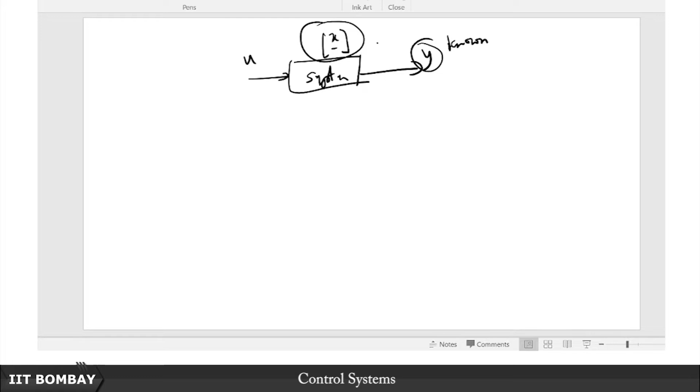What I am saying is basically, if you have the actual system, you have its output, here is its input, and sitting within the system somewhere is the state vector. Now somehow if you can rip it out based on this information that is known to you, can it be determined from y? That is the fundamental observability question. So if it can be determined from this y, then what you can do is you can feed this state information to another parallel system which is a simulated version of the original system.

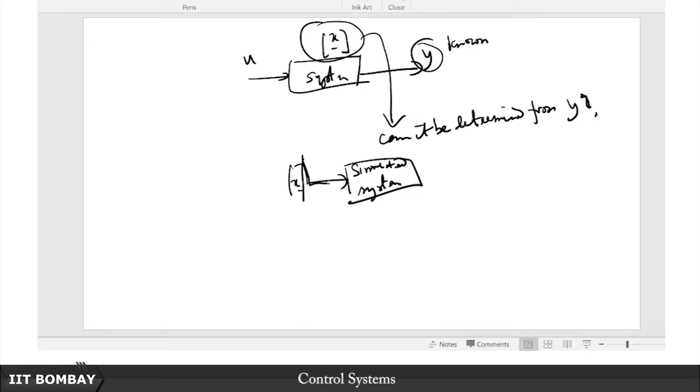So apart from providing it with the input, this is the state information that you provide along with the input, and this is your y hat. You provide the same input as given here in the same channel, and you will notice that if this is doable, if you can actually get the exact information about the state of the actual system into your simulated system by feeding that information through this channel, because after all this is a computer, a simulation platform, then what you get here at y hat is going to be identical to y. So it turns out later on we shall see that this is the idea of an observer.

Of course there is a lot of sophistication there, but this property of observability is crucial. Why is it crucial? Because it is this property that lets you answer this question in the affirmative: can you determine the state information based on the available information about the output? You can only say yes to that if it is observable. That is the crucial bit, the piece in the puzzle that is missing. If it is observable, then you can actually answer this question, you can extract the information about the state. So it is not just about the initial value condition, it is not just about the initial value problem and being able to figure out what to feed your system with.

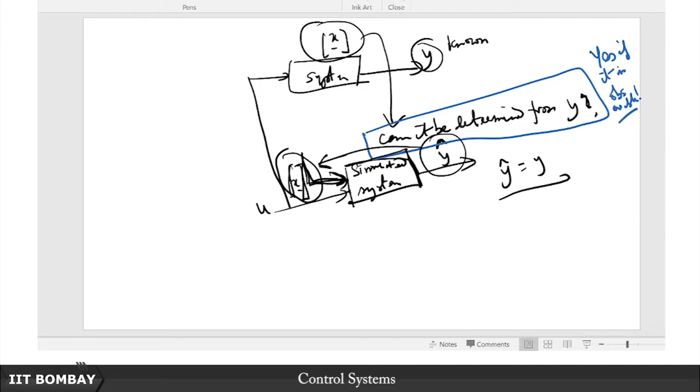Suppose this is the actual physical system, and you know what its parameters are supposed to be when the system is healthy, when it does not have a fault. If you are able to extract this state information from the output itself, and then feed that state information to a parallel computer simulation system, then you know what the ideal output is supposed to be, which is y hat. Under ideal circumstances, y hat is supposed to be equal to y.

So if you pass this through a comparator, it should always be a 0. If you say this is plus and this is minus, this y minus y hat should always be 0. So if you put some sort of a 0 detector, and under ideal circumstances that should be 0, now if that signal has some non-zero value, it means your y and y hat are deviating from one another.

Now of course you are assuming that your y hat, which is a computer, is running flawlessly because it is a healthy system—it's just a computer circuit. But your y, which is actually coming from the plant's output, that might develop some technical snag, some fault. So at least for fault diagnosis and detection, this is a very important property.

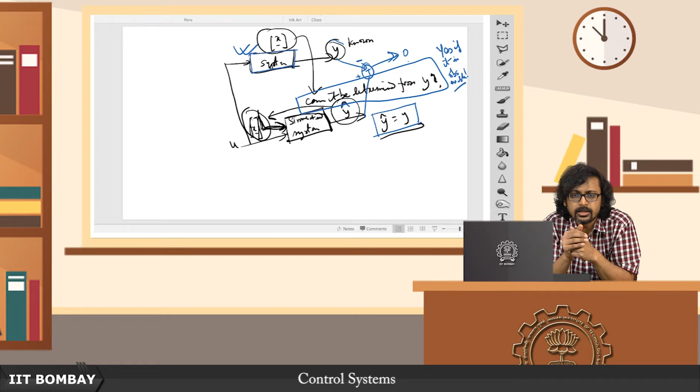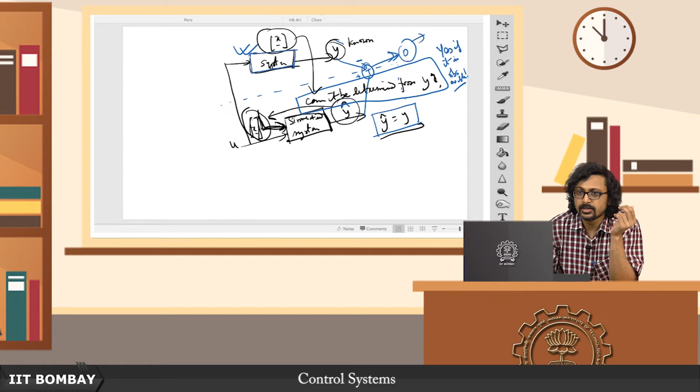The ability to infer about the state is very important, because then you can feed that state into a parallel simulation system, a computer, and compare the simulated output with the actual output to see if there is any difference. If there is no difference, your system is healthy. This can serve as a monitoring process of the system. So based on whatever this output is, if it is 0, you deduce the system is healthy. On the other hand, if it is non-zero, you might guess that something is amiss.

Of course there are small aberrations due to noise and other such phenomena, so those are always there, so you might want to keep some threshold around 0. But if it goes beyond a certain threshold, then you might actually say, well, I think the system has developed a snag, there is some fault going on.

So there are a lot of applicabilities. You might think that for the purpose of this initial value problem in this analog computer, it is an artificial problem, because after all, I have measuring devices, so if I want this particular set of y, y dot, y double dot, y triple dot and so on, why not just go and directly measure? Let's just directly measure the initial conditions at the op amps, at the integrators, and tune them till we get the desired y, y dot, y double dot and so on. So you might think, since we have access to the whole circuit, we can open up that briefcase containing the analog computer—this is a meaningless problem.

As I have shown you, it is not just about the initial value problem, but also this observability, the ability to observe or lack thereof, has very serious and important implications in things we may not have considered thus far, such as fault diagnosis and system monitoring. These are important things to bear in mind, so I hope you realize that observability is indeed an important notion.

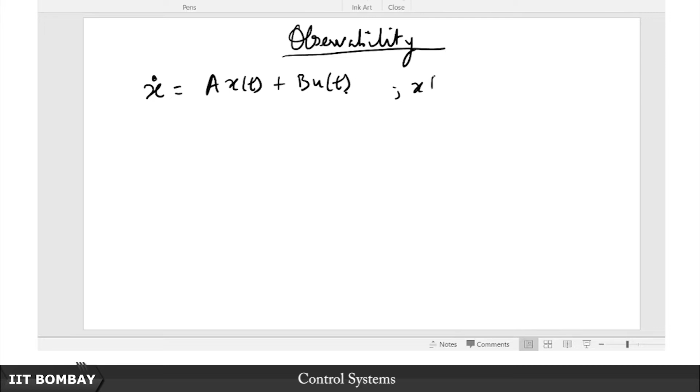So now let us launch into a little more technical discussion about observability. Let's see, initially we are talking about this initial value problem. So what is this system? The system is run by x dot equals Ax plus Bu, with x at t naught equal to x0, and y equals Cx plus Du. This is the general representation of the system.

Now suppose you want to infer about the state from the output. How can you do that? As a starting point, y is going to be equal to Cx plus Du. I am going to drop this t hereafter, just to make this simple. Now you wonder, there is after all only one output, and there are n states. So how are we going to get, from one equation, enough to solve for these n variables? It seems like an underdetermined system of linear equations, no? So how are we able to do this?

So I urge you to go back one step and see what sort of information is available when you have this initial value problem, because that is going to be the key. We are going to deal with two distinct things which are not very different, but have very subtle differences. One is this initial value problem: we want to figure out, for a given set of initial conditions in terms of y and its derivatives, what are the initial conditions for the state. Analogously, we will look at whether, if we have information about y at a given instant of time, not necessarily at 0, can we infer the state at that instant. The second problem results directly from this first problem.

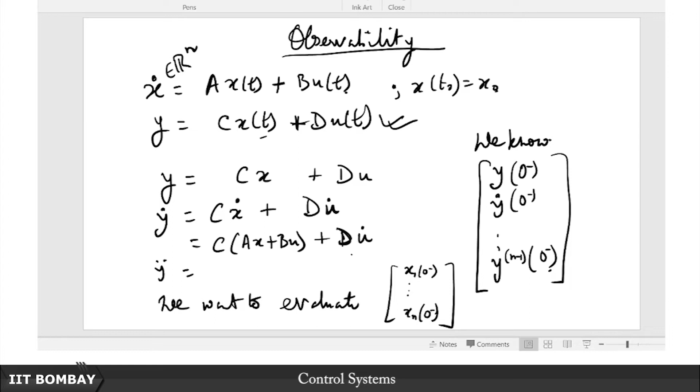carrying on with this d as non-zero, but I will for now assume that d is equal to 0, just to simplify my calculation, otherwise it takes a pretty nasty form. So I will just assume that d is equal to 0, it does not really matter, nothing else changes if you consider d equal to non-zero.

I will get this as c times, so let us consider this to be 0 now for the time being. So then we have this again c a x dot plus b u dot, c b u dot, like this.

So I will not consider the d, actually I can also consider the d, okay, let me keep, let me stay put with the d. It really would not matter much.

Let me see, c, yeah, there is this a here, and I am going to replace this with ax plus bu, plus cbu dot, right, is it cbu dot?

Okay, sorry about that, I think I messed that up a bit, the c should not be here, it is just this ax plus bu, so you take its derivative, so it is ax dot plus bu dot, so it is cbu dot, plus cbu dot plus d u double dot, likewise I can keep differentiating.

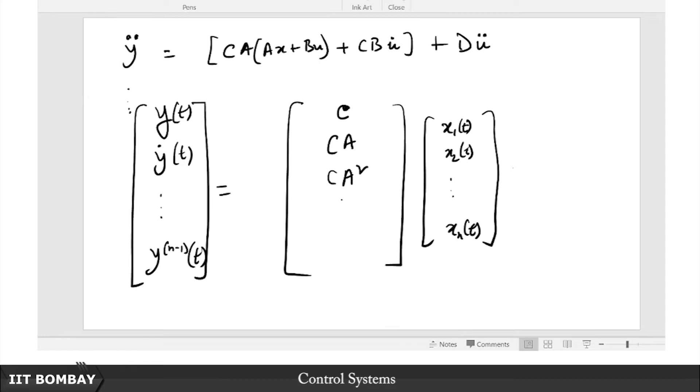So let me not simplify that. So I take back that exercise which I had given you, alright. So then this is going to be c a squared, likewise till the last one will be c a to the n minus 1, and this is the matrix which, let me define it at this point, this is the matrix which we call the observability matrix, and we will see shortly that this becomes a problem in linear algebra at the end of the day.

Plus, what sort of a matrix do we have next? So you see we will have this, so CB is basically, so we will have this matrix, and you will see here we have this U, U dot likewise, and U, how many last derivative will be U, as many derivatives as of n, as of y. So this last derivative will be the n minus 1th derivative of U. So this is going to be it.

But what are the entries of this matrix going to be? If you really, let me call this a curly D, not the actual D matrix, but the curly D matrix.

If you want to be careful about this, you'll see that the first entry is going to be D, the next entry is going to be C times B, and the next entry likewise, till you have the last one as C times A to the n minus 2 times B. So you see it matches.

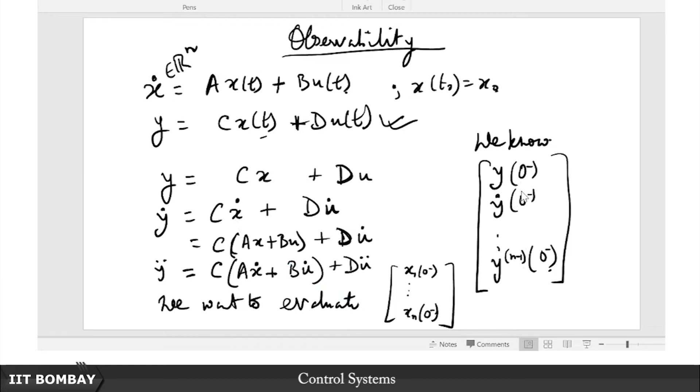Now look at what I already know, these values at t equal to 0 minus. So if I plug in t equal to 0 minus into both sides of this expression, what do you have here? At 0 minus you see this whole thing vanishes, because remember 0 minus is when, before all excitation or external input was applied.

So that is why I said for the initial value problem, maybe for state observability this will again begin to show up, but so far as the initial condition is concerned, before 0 minus this does not exist, the input does not exist, so its derivatives also do not exist, simple, the input is 0.

So at 0 minus it turns out that I have y dot at 0 minus, likewise till y to the n minus 1 at 0 minus, this is just given by this observability matrix times x at 0 minus, this is basically the state vector, so this is x1 through xn at 0 minus, and now this is very standard, something we have been doing since we were kids.

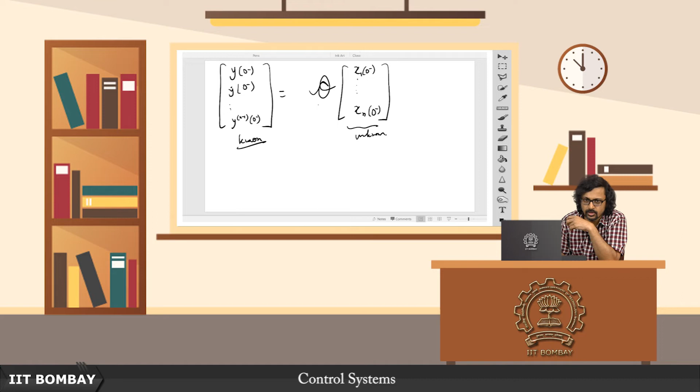This is basically of the form Ax equals B, okay let me not use that notation, but you know what I mean. This is basically a system of linear simultaneous equations. This side is known to me or given to me, and this is the unknown. When can I determine this? Of course, we are assuming this is a square matrix, which will be the case if it is a SISO system, because there is only one input, one output.

Look at the size of this. How many rows does this have? How many columns does this have? Remember, C belongs to R 1 cross n, so this has n columns. How many rows are there? This is already a single row, this is also a single row. So how many such rows are there? This is n rows, right? So therefore this is an n cross n matrix. So this O belongs to R n times n. It is an n cross n matrix.

So we have as many equations as the number of unknowns. When is this solvable? This is solvable if and only if, for any y0, y dot 0, and so on - you give me any vector as the initial conditions in terms of y and its derivatives, and I will be able to determine the states for you if and only if O is invertible, or non-singular, or in multivariable parlance - it will not be a square matrix if there are multiple inputs and outputs, precisely when there are multiple outputs - then you say that this is full, here is the important bit, full what?

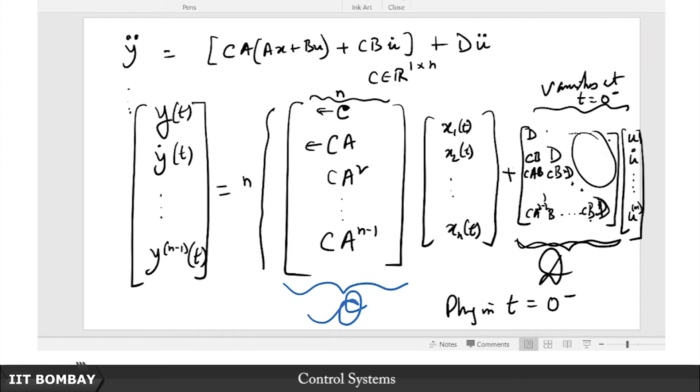So this is of course in the context of this initial value problem. But now let us look at the general problem. As I said, when you want to use this as a fault diagnosis or detection technique, for the general problem we had better consider all of these things, because we will then not be able to say that this input and its derivatives vanish at any arbitrary instant. Only at t equal to 0 minus, before the application of the input, they are all 0, but in general we will have this.

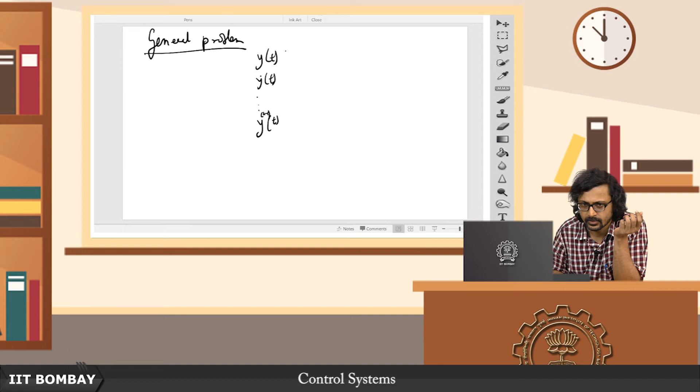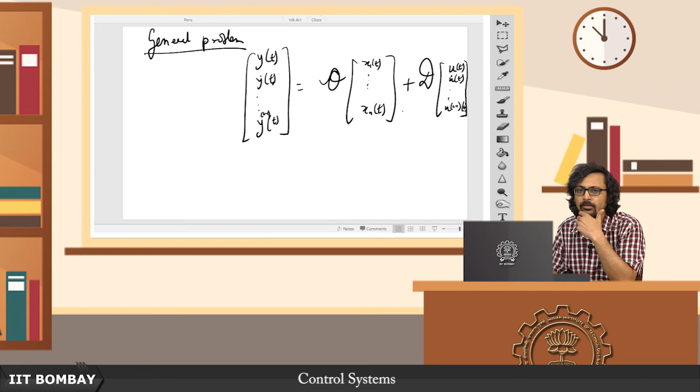y(t), y dot(t), dot dot dot, till y^(n-1)(t), given by this observability matrix times x1(t), dot dot dot, till xn at t, plus this D matrix - not the system D matrix, I hope my handwriting distinguishes between the two of them. This is the curly D, and you have this u dot, so on till u^(n-1) dot. So that is basically it. Now this problem is tantamount to saying - let me name this capital Y, and name this x. So then the problem becomes one of saying that it's - let me name this curly u.

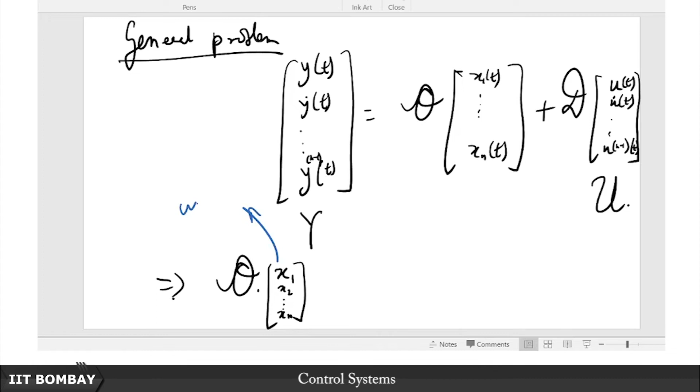So then this problem becomes as follows: we have this observability matrix times the x1, x2 vector - so this is my unknown. And then on the right hand side I have this y minus this curly u, of course pre-multiplied by d.

And now you might say that the same idea holds here, that whether this observability matrix is invertible or not is going to tell me about whether the system is observable or not. But here there is a small catch. What is the small catch?

Think about how we are getting this y practically. We are feeding in some initial conditions, simulating the system, applying this input and its derivatives, we know what its derivatives are, we are actually simulating a system and measuring the output. This y is known, and it is not just known, it is measured. So there is a small difference, this is known and measured, and this is going to make all the difference between this first formulation and the second.

In the earlier formulation, remember, this was known too, but it was known and given to me, like I am trying to simulate the system. So this was like an artificial sort of problem where you tell me some bunch of initial conditions and I have to simulate the system. But here this is actually coming from an actual system, so this is measured, not just some arbitrary y that has been given to me.

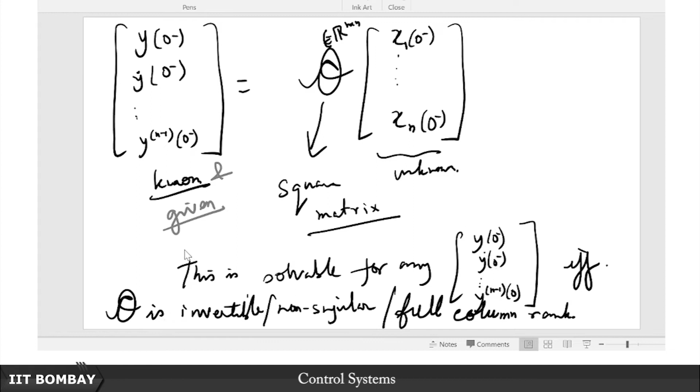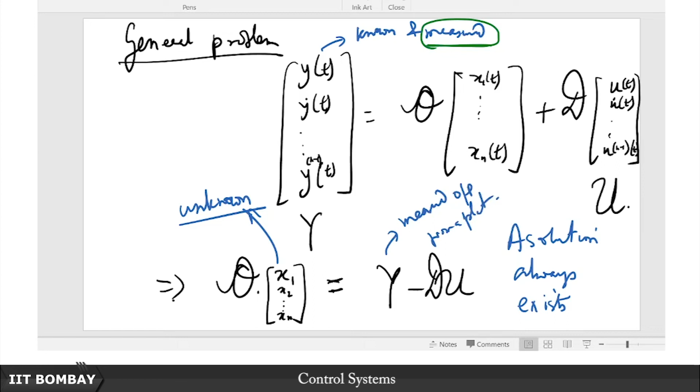So in this case, unlike in the previous case where it is only solvable if and only if, for any initial condition in terms of y dot and so on, the O matrix is invertible, here the claim is that a solution always exists, because after all this is coming from an actual plant, this y is actually a measured output from a plant. So clearly there exists some values of states for which this equation must be true, this equation is kind of identically true.

So you might think, then what is the big deal about observability? You said just a while back that in order to infer about fault detection and all this, you need to be able to get the solution of x from here, feed it into the parallel computer, and then compare between these. So if now you are saying it doesn't matter, provided this u is something you are force feeding into the system and this y is something you are measuring at the output, a solution will always exist. So then what's the big deal? Are we making too much out of this problem of observability? Turns out there is something subtle that we might be missing here.

Suppose this O is singular, suppose it is not invertible, even then a solution exists, but what do we know about such solutions? I am going to use a little bit of linear algebraic parlance here. Let me give you an example. Say for instance I have this system of equations, let's use p, q, r. p plus q plus r is equal to 2, and 2p plus 2q plus 2r is equal to 4.

And let's say p plus q plus 2r is equal to 8. The point is, do you think there is a solution to this system of equations? Of course there is, but what is the problem with this? The solution exists but is non-unique. Why? Because apparently on the face of it I have 3 equations and 3 unknowns, but of those 3 equations, 2 of them are just scaled versions of one another, they are linearly dependent. So effectively I have only 2 equations: p plus q plus r is equal to 2, and p plus q plus 2r is equal to 8, from which I determine that r is equal to 6. That is all I can say.

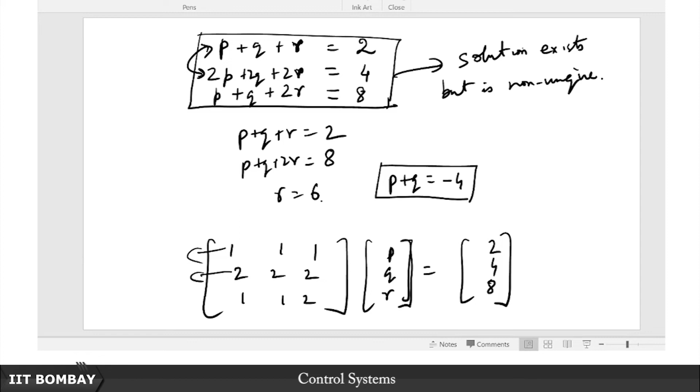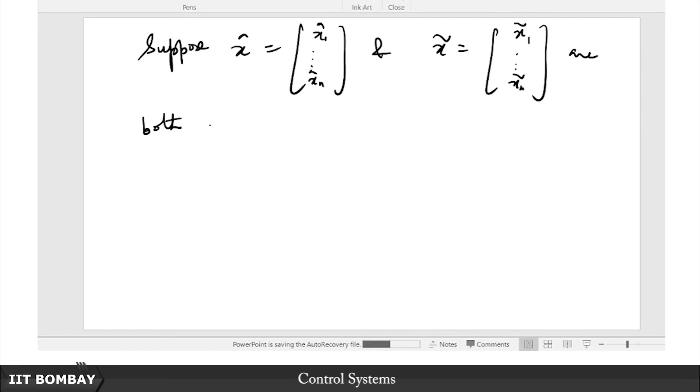So for example, if I get a solution to the system, say, suppose x hat is equal to x1 hat dot dot dot till xn hat, and x tilde is equal to x1 tilde dot dot dot till xn tilde are both solutions of, let me name that equation something, let me call it star equation. So this is the star equation. Let us say these are the solutions of this star, and x hat is not equal to x tilde. So if this is the case, then we are still in trouble.

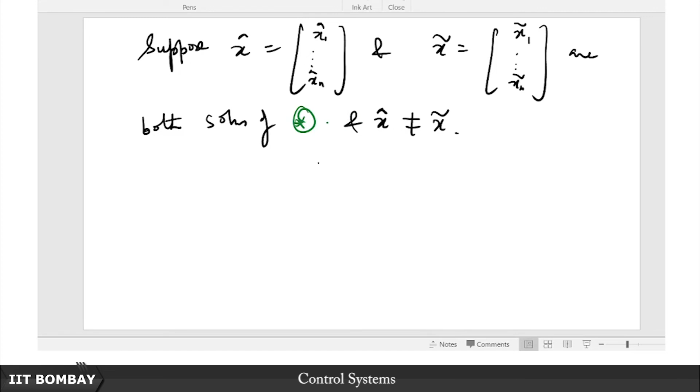Why are we in trouble? Because then you see that there are two different solutions to this system, and if you now go back to this fault detection problem, you are left to wonder as to which one do you feed in, whether you feed in x hat or x tilde. Because if you feed in x hat, remember we are assuming that the solution is unique given a particular initial condition. If you feed in x hat you will get one solution, if you feed in x tilde you will get quite another solution. So then what is the catch? How can it be that you can still compare?

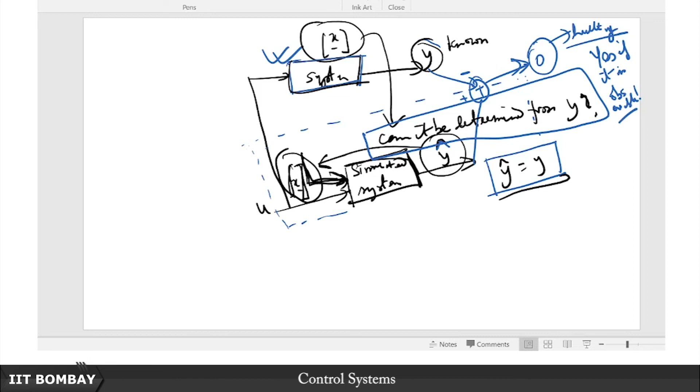Because remember, if you feed in those two different inputs, then your system simulation itself will change. You are giving it two different initial conditions, so your trajectories will all be different. So if your trajectories are all going to be different, then you do not actually know which is the actual solution of the system, of the original plant, that is. So if you are giving some arbitrary input to your simulated system and comparing it with the plant's output and taking the difference, then you really do not know.

The problem here is that this output does not capture, I mean when you have lost observability at a physical level, what it means is that this output does not depend on all of the states. So what is essentially happening is, if I were to explain it in a very layman's fashion, you can have this x1 tilde, x2 tilde dot dot dot till xn tilde, very loosely, this is one example, is equal to say 1, 2, 3, 4 like this, 5, 6, and then let us say last one is 10, so n is equal to 10, let us say.

And you have x hat 1, x hat 2, like this till xn hat, equal to, let us say 1, 2, 3, 4 till 6, and then 7th, 8th and 9th are 0, and the last one is again 10. And your C matrix, the output matrix, is going to be 1, 1, 1, 1, 1, 1, the next 3 entries are 0, and the final entry is again 1.

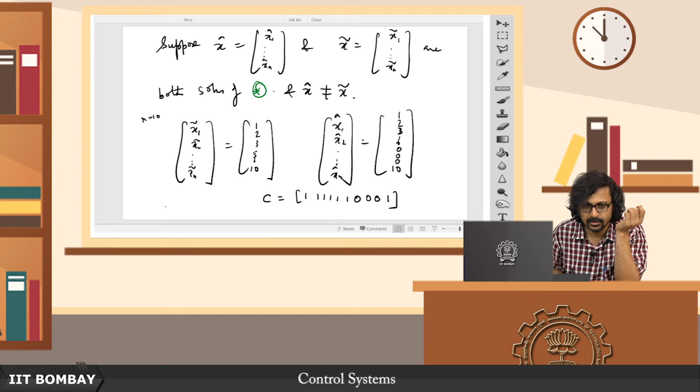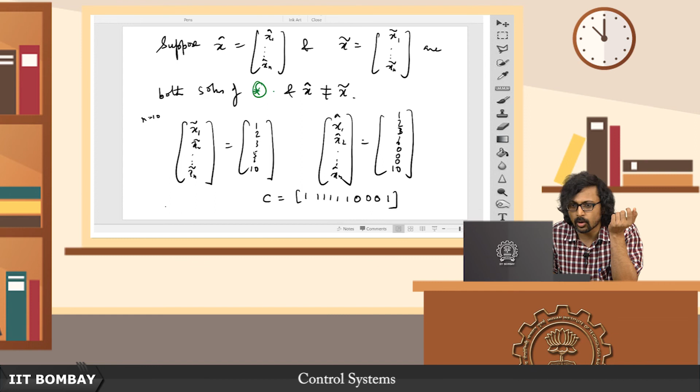Now you see that if you pass C x tilde and C x hat, you are going to get the same y. Why? Because they agree in these 1 to 6 coordinates, they do not agree in these 3 coordinates, but those 3 coordinates are not being picked up by the output, the output does not depend on those 3 states. So therefore, even though you get the same output for x tilde and x hat, you can never be sure which particular value, because these 3 could have any arbitrary value.

So now which initial condition or which x do you choose to simulate this system or kickstart this fault detection system? The solution existing is not good enough. So even though you might have had a glimmer of hope that maybe for the initial value problem observability is important, but at least for the general problem of determining the states from the output, there is always going to be a solution irrespective of whether the observability matrix is singular or not, because after all this output has been cooked up using some input and it has actually come through the original system.

I want you to understand why it always has a solution, because this is coming through an actual system to which you have given this input u, and u dot, they have already acted on this system and suitably spat out this output y and its derivatives, they will all agree. But now we have seen that even in this case the existence of the solution is not a problem, but the uniqueness is a huge problem. So therefore even for the general problem of getting the state information from the output, this property of observability is particularly significant.

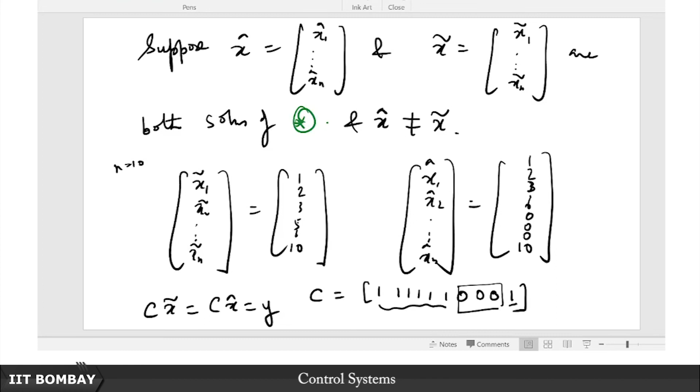So you might now wonder, suppose you have lost observability, suppose O is singular. Then you might ask, okay, O is singular, but look, what we were doing was taking up till the n minus 1th derivative. So let me go ahead and take more derivatives till I get linearly independent equations. After all, you see this analogy here, we had 3 equations and 3 unknowns, but actually 2 of them turned out to be linearly dependent on one another. So it reduced to effectively 2 equations. So if we had another equation somehow cooked up, we could have solved for this system uniquely.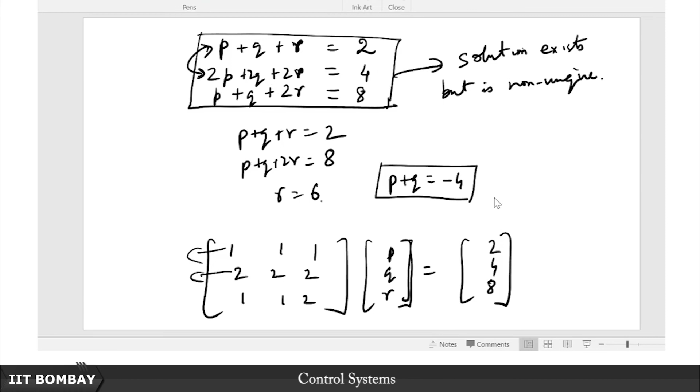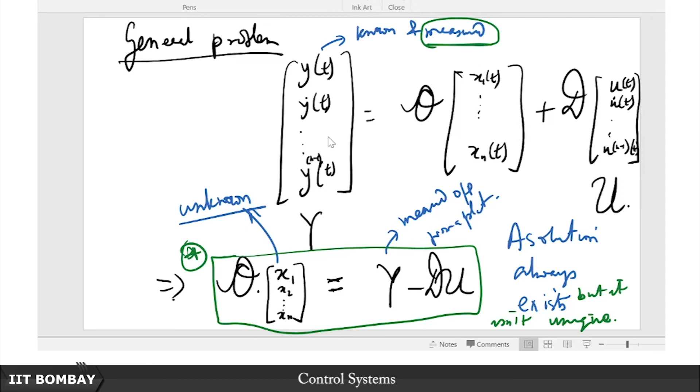So can we not do something like that here? Maybe let me differentiate this once more and get a larger size and discard some equation from one of these, till I get a full rank. It turns out that due to this so-called Cayley-Hamilton theorem... so the question here is, can we take higher derivatives of y to compute x uniquely? Unfortunately, the answer is no, and that is because of the Cayley-Hamilton theorem.

You see, Cayley-Hamilton theorem says that every matrix satisfies its own characteristic equation. So A is an n cross n matrix. The characteristic equation of A is given by the determinant of sI minus A. So this is an nth degree equation, an nth degree equation or polynomial.

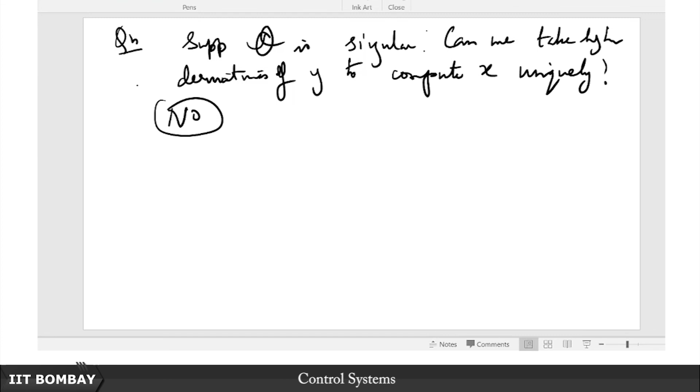So this is the characteristic polynomial, this is the characteristic equation. This is an nth degree polynomial which has n roots. So therefore, if I substitute A here, I will get some A to the n, and it is a monic polynomial, as we have also probably discussed earlier. So therefore we have A, some alpha 1 times A to the n minus 1 plus dot dot dot till alpha n times A to the power 0, which is I.

So this we know is the characteristic polynomial, where chi A of S is equal to S to the n plus alpha 1 S to the n minus 1 plus dot dot dot plus alpha n. This is the characteristic polynomial. So this matrix satisfies its characteristic polynomial, the characteristic equation.

So therefore A to the n can be written as a linear combination of A to the n minus 1, minus alpha 2 A to the n minus 2, likewise, minus alpha n I.

So then what about A to the n plus 1? That is nothing but A times A to the n. So that is going to be, again this A is going to appear like minus alpha 1 A to the n minus alpha 2 A to the n minus 1, dot dot dot till minus alpha n A.

But again here, if you notice carefully, this A to the n, I can again rewrite this using the Cayley-Hamilton theorem. So now let me focus on this A to the n again. So this is going to be further equal to this minus alpha 1 times some factor like this, which I am going to plug in here, and then minus alpha 2.

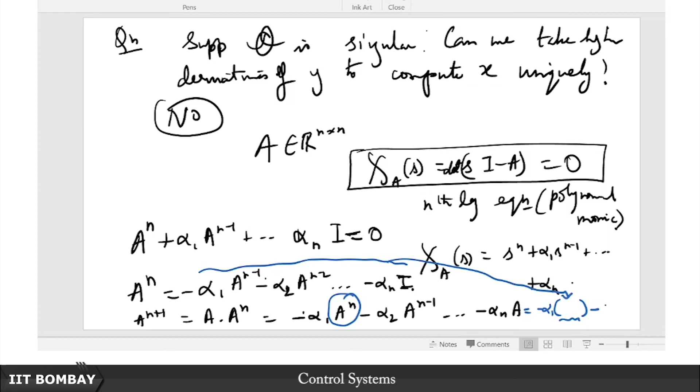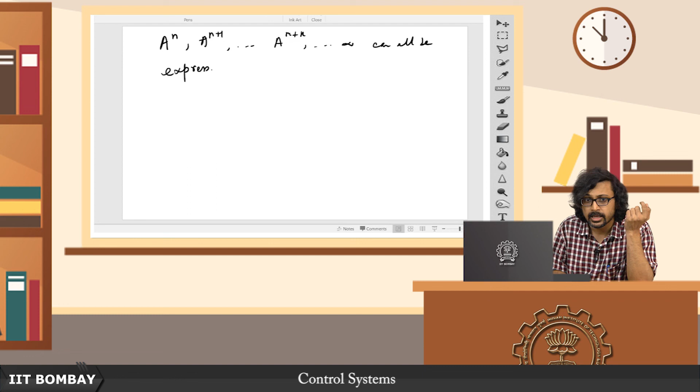So the point is that beyond A to the power n and higher powers, the point of this Cayley-Hamilton theorem is that A to the power n, A to the power n plus 1, dot dot dot, any power of A to the power n plus k, till infinity, can all be expressed. We have already seen an application of this when we evaluated the matrix exponential using the Cayley-Hamilton theorem. They can all be expressed as a linear combination of I, A, A squared, so on till A to the n minus 1 alone.

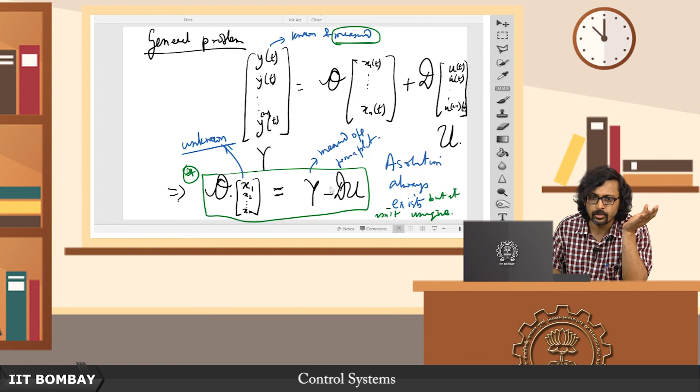So therefore you might wonder, if I can extend this observability matrix, look what you are going to get. The first few rows are going to be C, CA, dot dot dot till CA to the power n minus 1. The moment you try to write this as CA to the n, I can replace this as a sum.

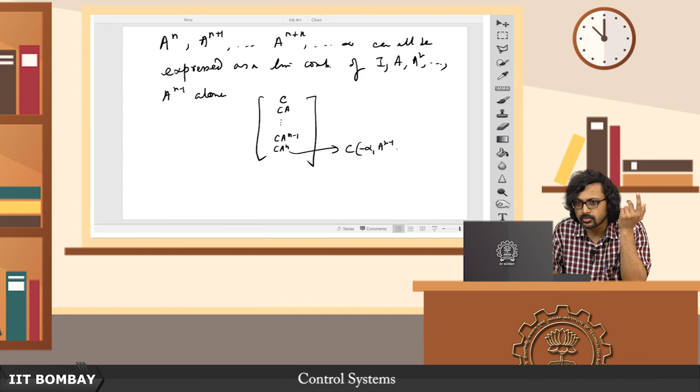This is going to be C times some minus alpha, let me see the indices, minus alpha 1 A to the n minus 1, A to the n minus 1, minus alpha 2 A to the n minus 2, likewise. So therefore this new row that you are now inserting is a linear combination of preceding rows.

So once you have determined that this C, CA, likewise, till CA to the power n minus 1, this square matrix, in case of SISO, once you have determined that this observability matrix is singular, no amount of remedial measures like taking higher and higher derivatives of y will ever help you recover observability. Either it is observable as observed from the first n minus 1 derivatives and y itself, or if it fails to be observable, higher derivatives will not add any extra information.

In fact, this also tells you something even more interesting. Because this y is generally smooth, we can actually expand it as a Taylor series around this time t. So then y can be expanded as a Taylor series.

So suppose you want to expand it as a Taylor series, then it will contain terms like y at t. So y at t plus delta is equal to y at t. This is a Taylor series, so I am going to truncate it at some point. Even if I do not truncate it, you see this is going to be delta y dot t plus dot dot dot, plus delta to the power r upon factorial r. I think that is the Taylor series.

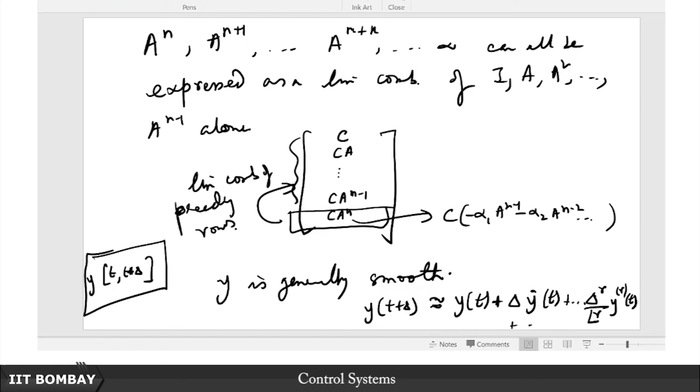Unfortunately, not every form of state space realization is guaranteed to be observable. For example, if you realize it in the observer canonical form, it will be observable, but if you realize the same system in the phase variable canonical form like we also discussed, it may or may not be observable. In fact, we will see later that this is tantamount to pole zero cancellation. If a pole zero cancellation does not happen, then any state space realization is observable. If a pole zero cancellation occurs, then not every realization is going to be observable.

So we will see that relation between similarity transformation, observability, and that particular so-called observer canonical form. There is also another canonical form called the observability canonical form, where not only is this observability matrix of full rank, but it also turns out to be identity. We will not talk about that, that is a very easy matrix, observability is very easy to check for such a matrix, but we will see that the matrix we will consider, from there also it is very readily observable, or can be inferred, that the observability matrix will be of full rank, that observer canonical form.

So in the next lecture when we return, we shall first start with that particular realization with those banks of integrators, and we will see that if you realize it in that form, it is always going to be observable. Then a very crucial property, we shall see that if you go via the route of similarity transformation from an observable realization, then all of those forms will always be observable. Once that is through, we shall look at the second most important property, which is a dual property to observability called controllability, and we will likewise carry on some similar discussions about it.